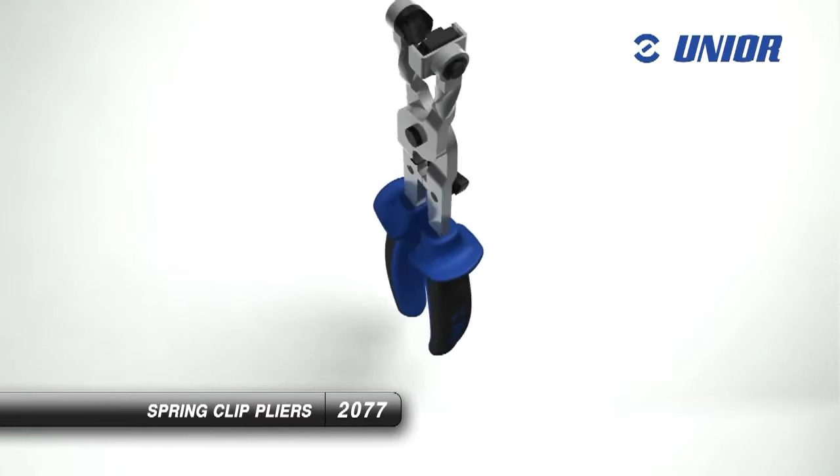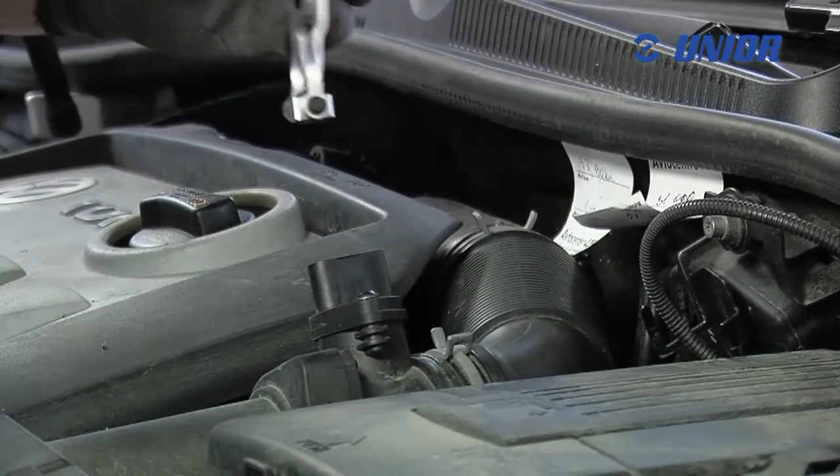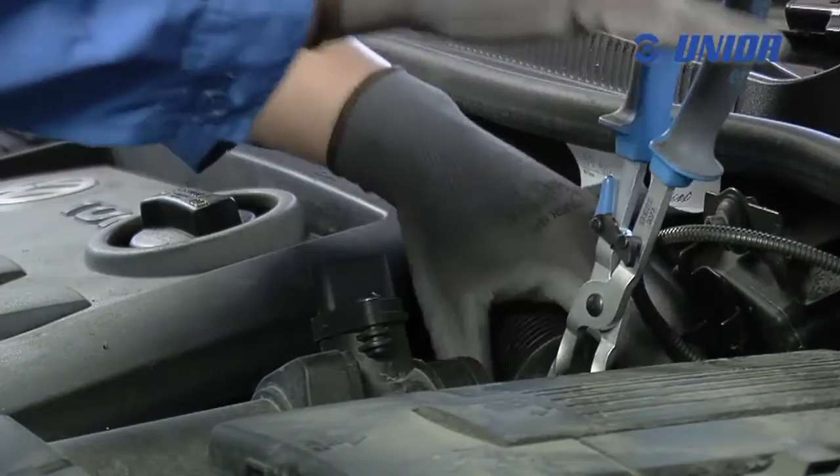Spring clip pliers are used for opening tube clamps, enabling the quick and safe removal of tubes from tube extensions. They're also used for closing the tube clamps when tubes are attached to tube extensions, to prevent tubes from falling off the extensions, thus ensuring the safe movement of fluids. The pliers can be efficiently used in places which are difficult to access. A firm and safe grip is ensured by the ergonomic shape of the handles.

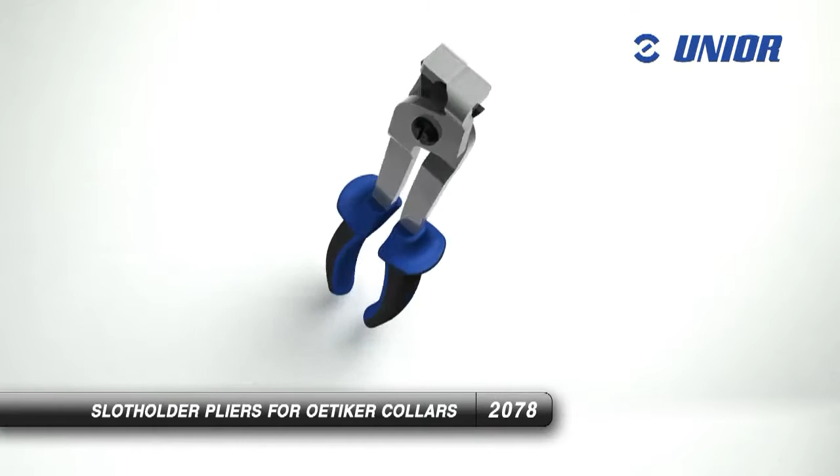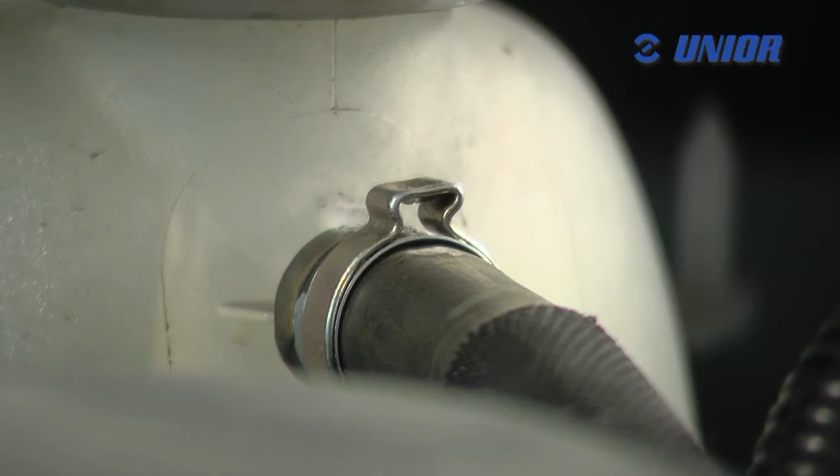Slot holder pliers for Oetiker collars are used for opening the tube clamps, enabling the quick and safe removal of tubes from tube extensions. They're also used for closing the tube clamps when tubes are attached to tube extensions, to prevent tubes from falling off the extensions, thus ensuring the safe movement of fluids. The pliers can be efficiently used in places which are difficult to access. A firm and safe grip is ensured by the ergonomic shape of the handles.

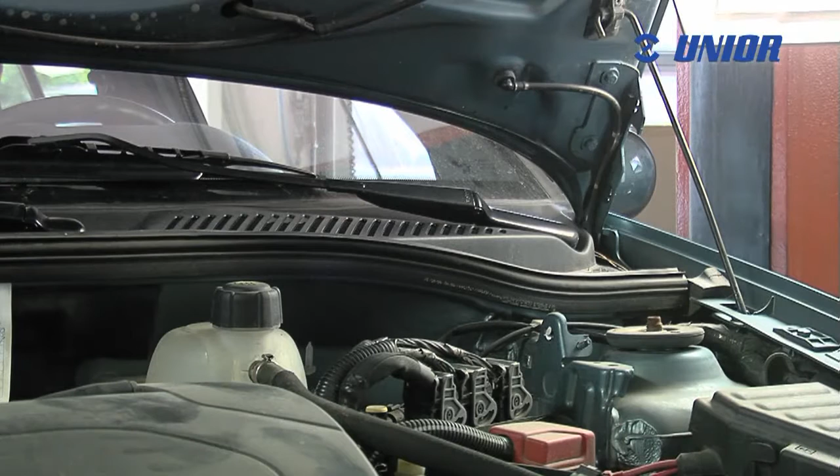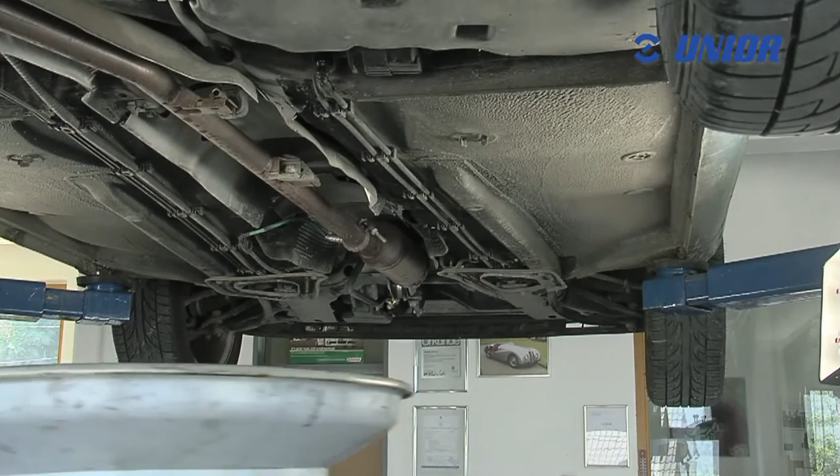Quick coupler pliers for fuel pipes are used for the removal of the quick couplers that connect fuel lines. The tool has two forged pins in the jaws that compress the coupler during removal or repair, so the hose can be removed. The jaw is dimensioned and adjusted to enable safe and easy work with great force in a limited space.

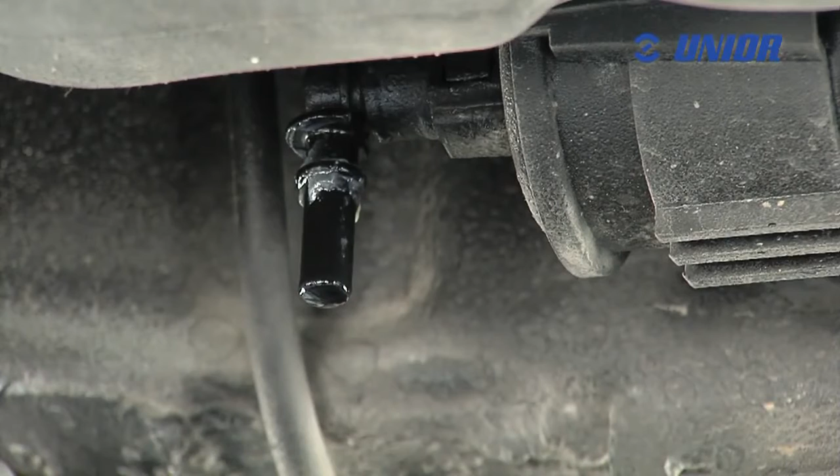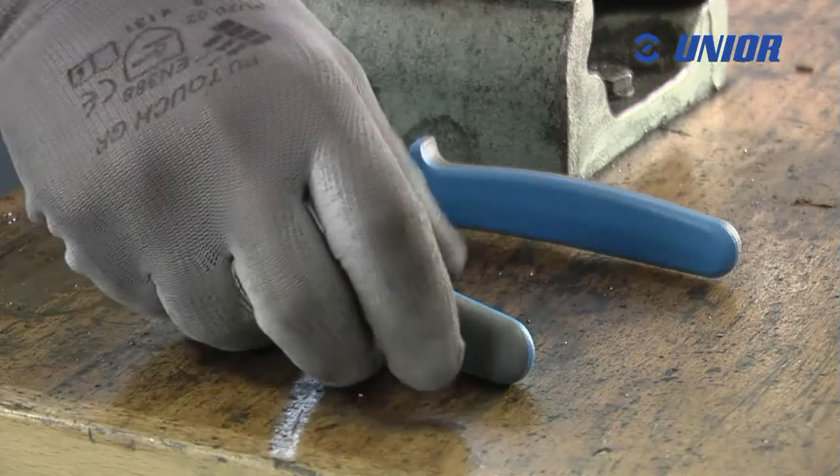Click collar pliers are used for opening the tube clamps, enabling the quick and safe removal of tubes from tube extensions. They're also used for closing the tube clamps when tubes are attached to tube extensions, to prevent tubes from falling off the extensions, thus ensuring the safe movement of fluids. The pliers can be efficiently used in places which are difficult to access. A firm and safe grip is ensured by the ergonomic shape of the handles.

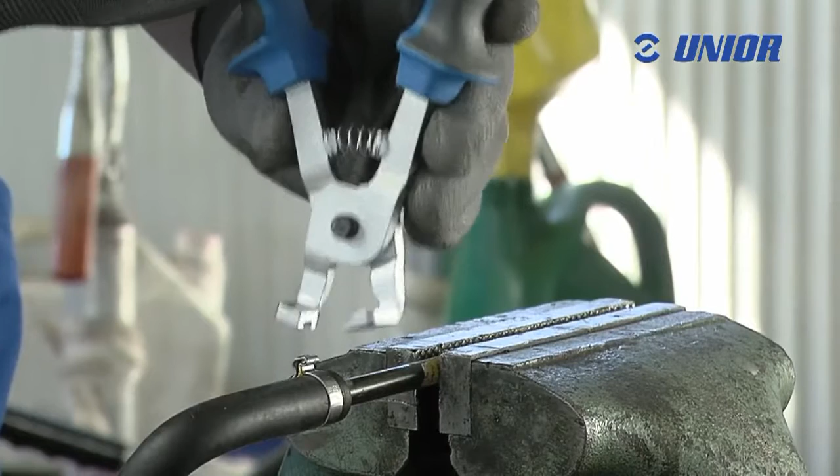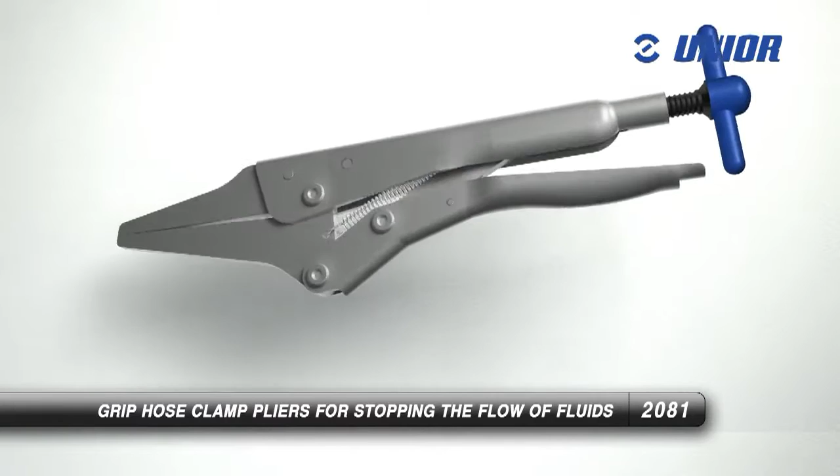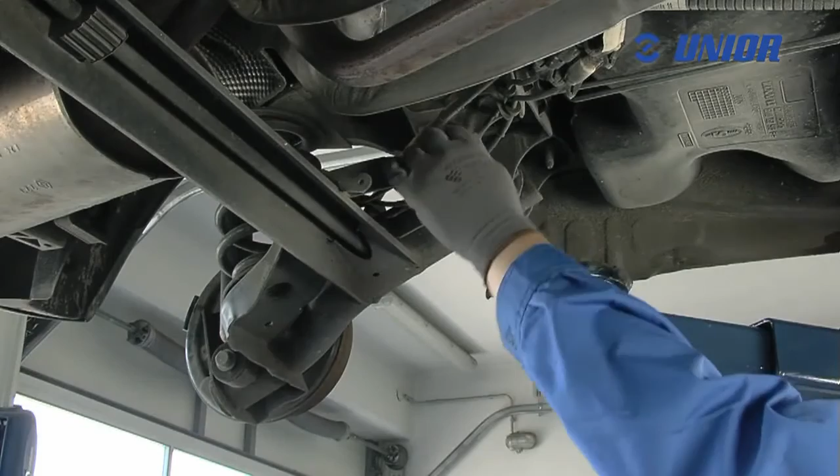Grip hose clamp pliers for stopping the flow of fluids are an indispensable tool when changing various automotive parts connected with liquid-bearing hoses. The tool's main function is the stoppage of the flow of various fluids in soft hoses, so a certain part can be replaced without interruptions or worrying over a potential spillage. The tool can be used on soft hoses in cars, trucks, agricultural machinery, as well as various nautical vessels.

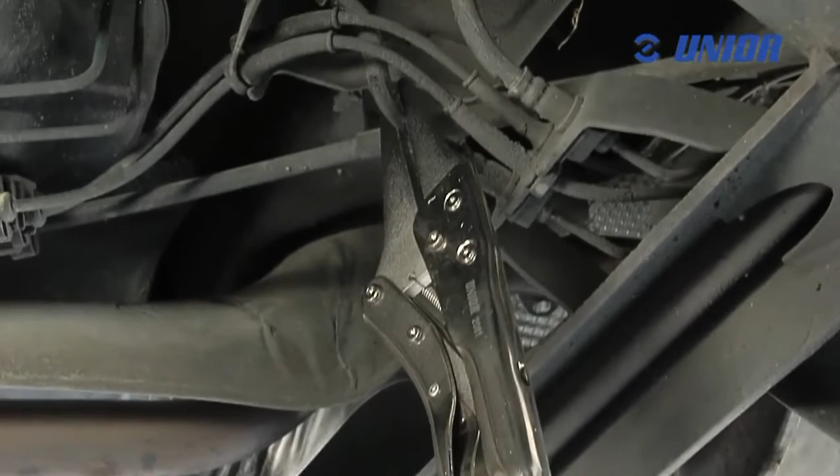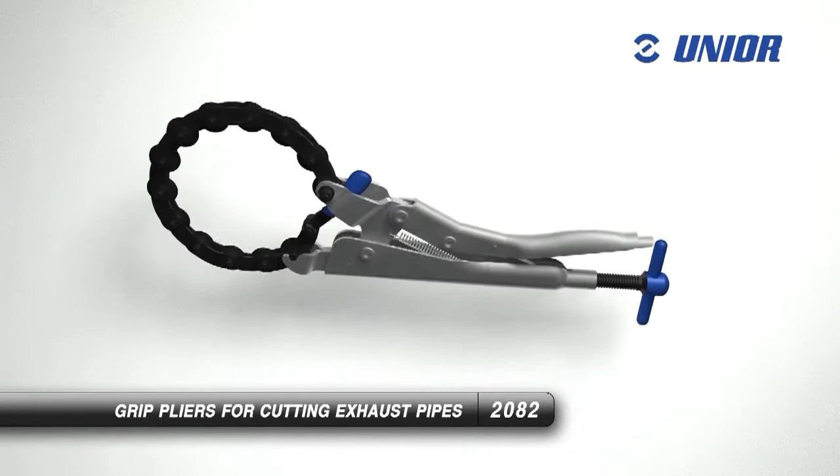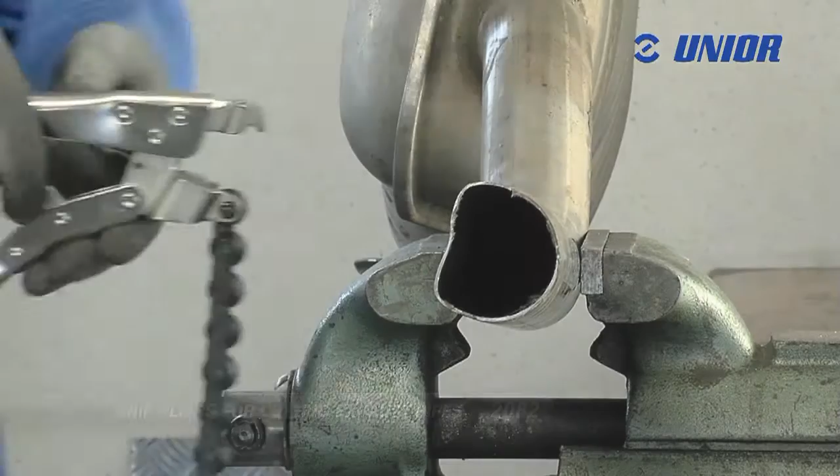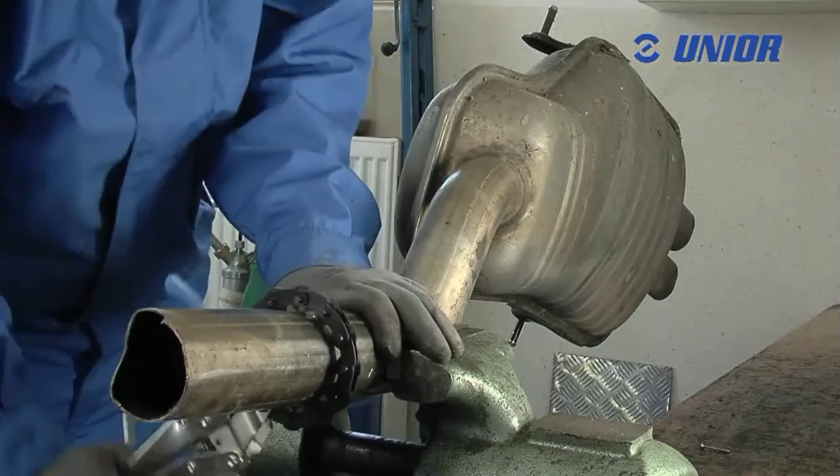Grip pliers for cutting exhaust pipes are primarily intended for cutting exhaust pipes, but they can also be used for copper pipe, plastic pipe, and various other pipes with a diameter between 25 and 85 millimeters. The tool is safe and easy to use due to accessories like a longer cutting chain, larger cutting blades, plastic-coated T-handle that decreases the amount of force necessary to use the tool, and universal locking mechanism. The cutting chain is subject to wear, which is why we are offering it as a spare part.

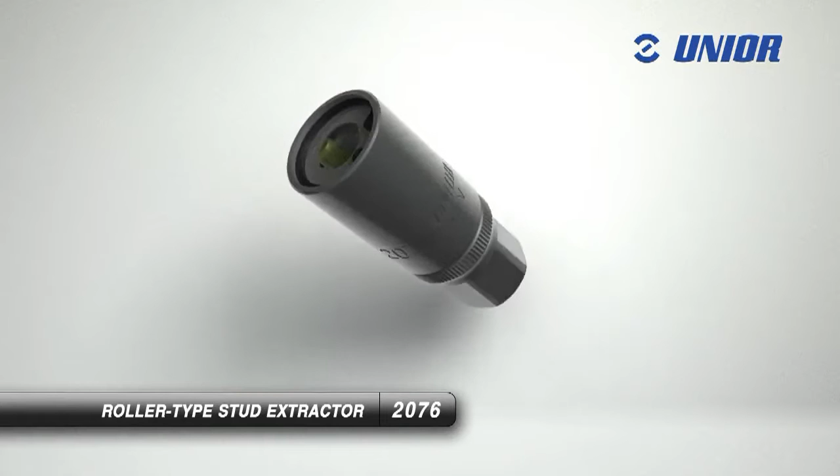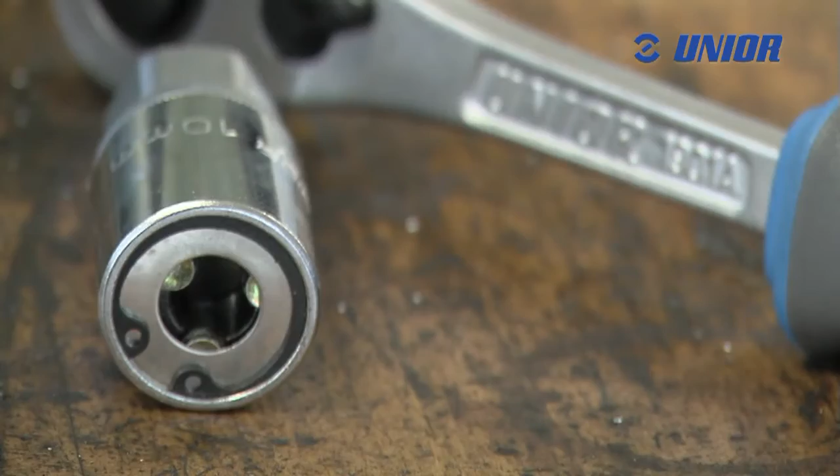The roller-type stud extractor is a tool for removing studs without damaging the threads. The tool works through a system of 3 rollers that grip the stud at 3 points during removal, removing the stud without damaging it. The rollers have no sharp edges, enabling removal without causing damage. Despite this, the tool can work in both directions. Tightening with the tool is not recommended, however, as the increased force when tightening could damage the system of rollers, which are dimensioned solely for loosening.

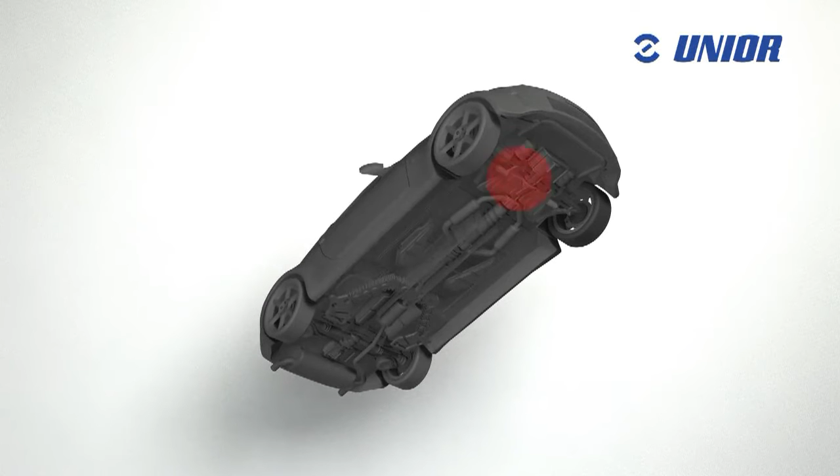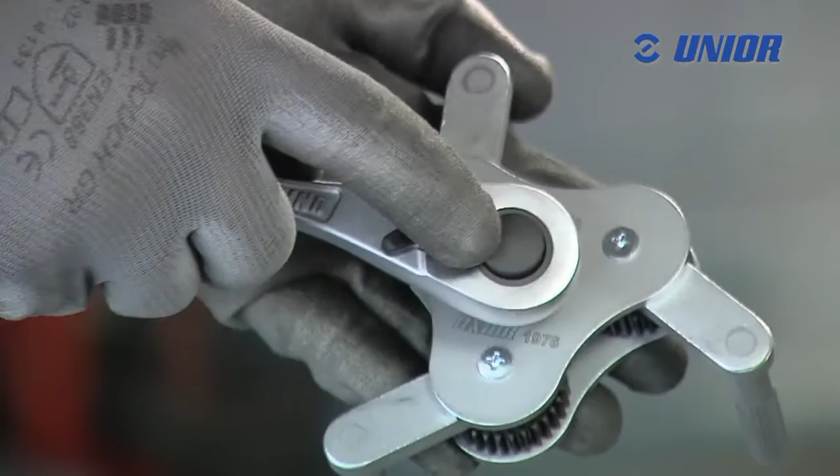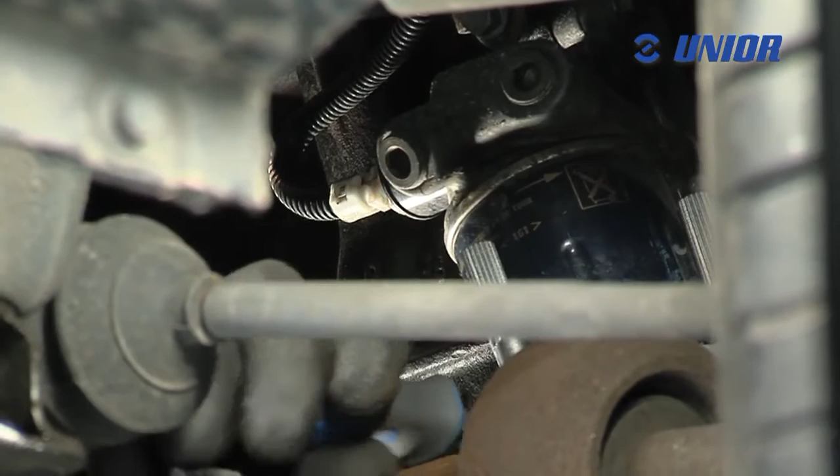The adjustable oil filter wrench can be used on the majority of standard filters. When used, the tool conforms to the filter, as tightening it makes it grip the filter. Because of the limited space during changing, the tool is sized and adjusted to require as little space as possible. The hooks are ribbed to make them suitable for filters without an edge to allow gripping. The tool works in both directions and thus allows both the tightening and loosening of oil filters as it adjusts and utilizes the effort invested optimally in both cases.

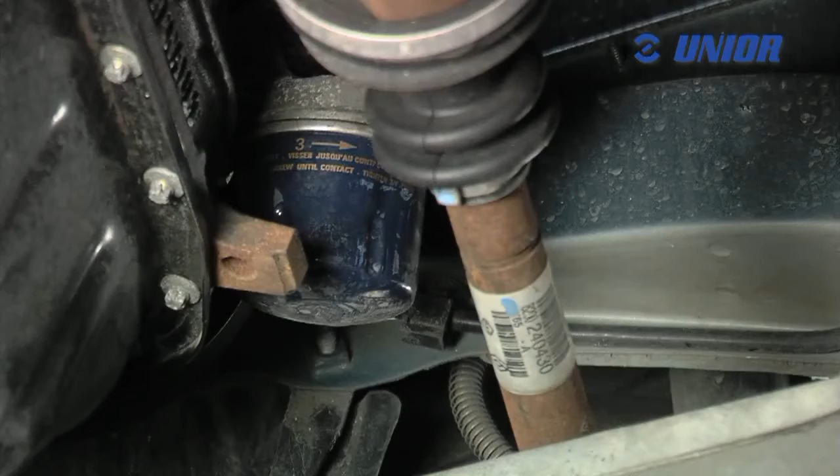The oil filter wrench tool comes in as many as 8 sizes, which can be used on the majority of standard car oil filters on the market. Using it is simple, as all that you need to do is place it on the filter and rotate it easily. The tool can be used when fitting oil filters, as the design and material have been carefully selected so that the tool can withstand the maximum force applied to it. Because of the surface protection, the tool is highly resistant to scratches as well as to atmospheric and chemical effects.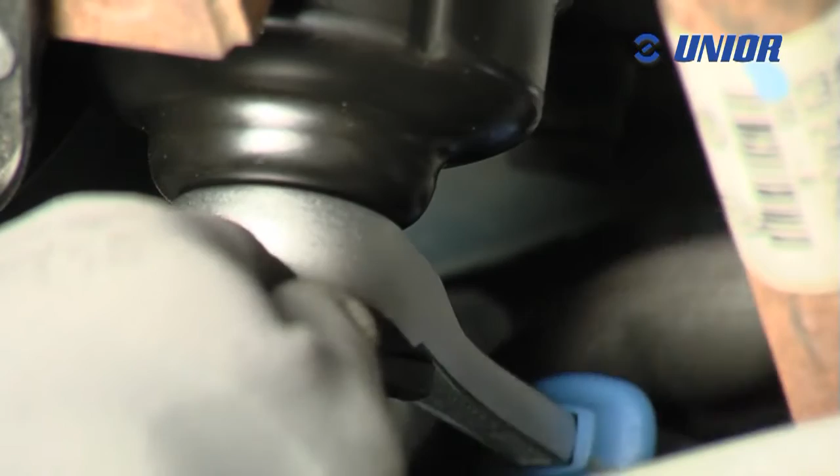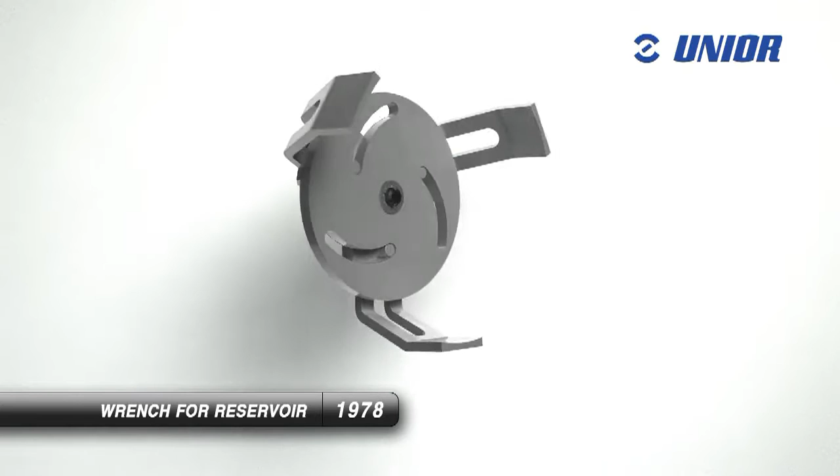The wrench for reservoir has 3 removable hooks that grip the gas tank cap firmly so it doesn't move. As access to this cap is usually difficult when making replacements, the tool is constructed so that it requires minimum space. Simply place the tool on the cap and rotate it in the appropriate direction.

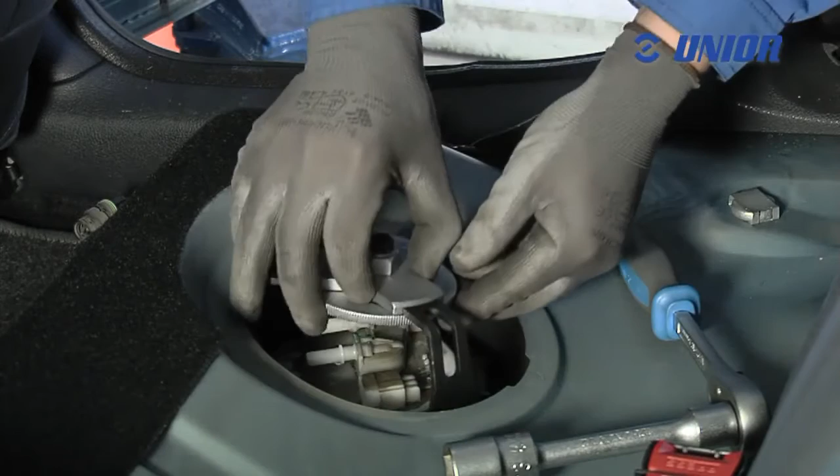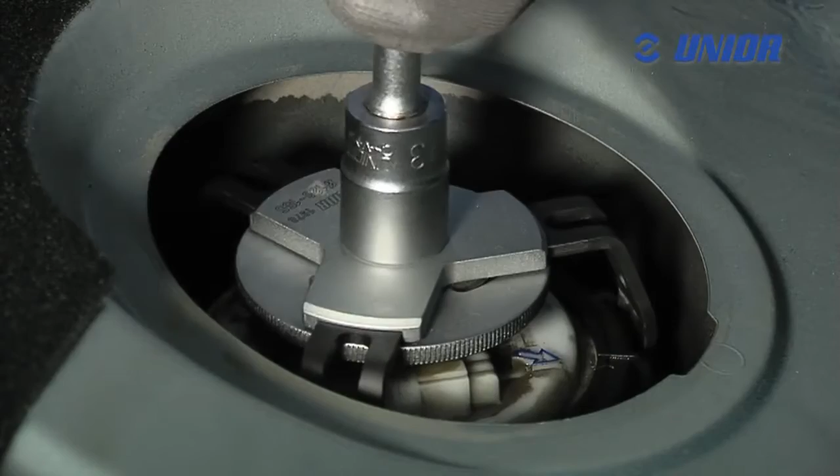The tool adapts to the cap itself and the cap can be removed very quickly. The replacement of the cap is also straightforward. This tool ensures safe work and long service life.

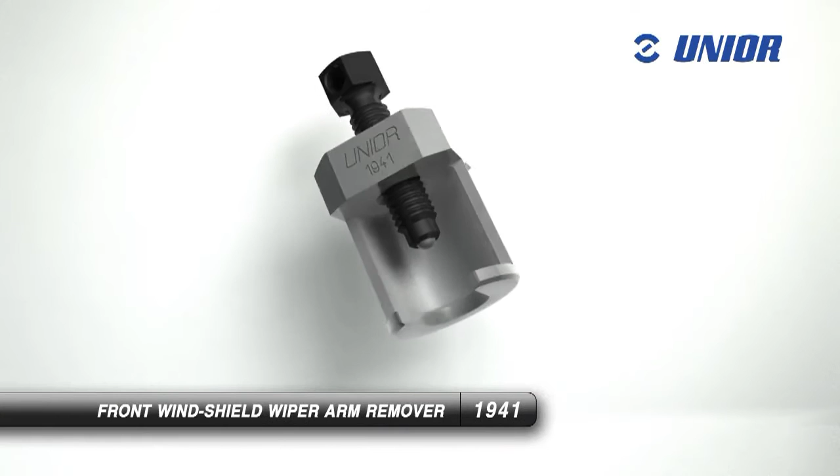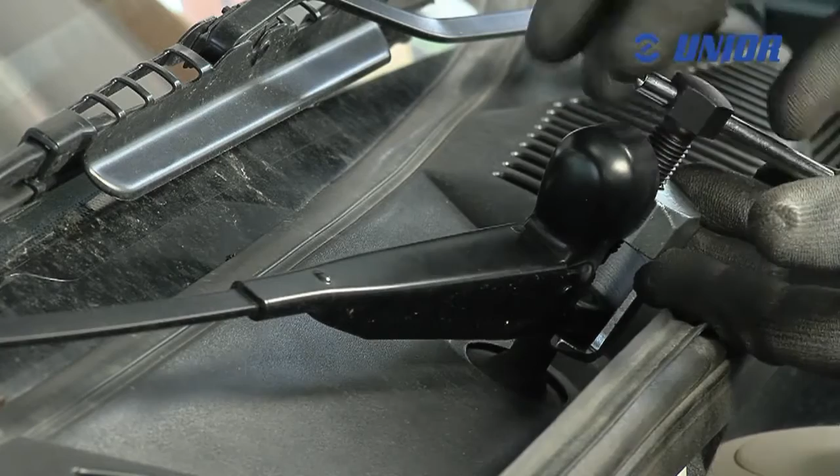The front windshield wiper arm remover is a tool for the removal of front windscreen wiper arms, with a robust construction which enables the application of greater forces when removing arms that have become glued to the drive shaft, as well as extending the service life of the tool. They are used for removing wipers elevated above the surface of the car body. Working with this tool is straightforward and quick.

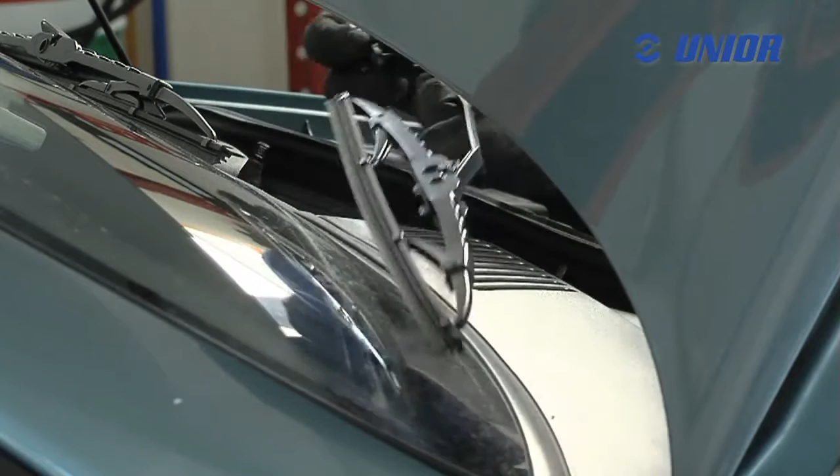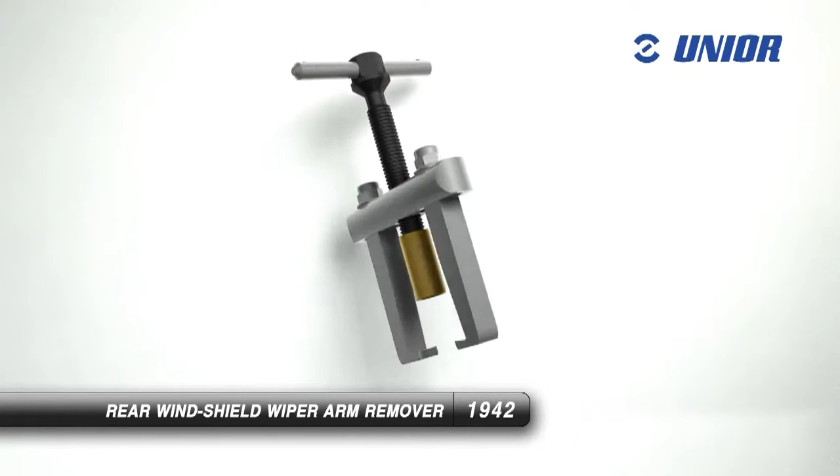The rear windshield wiper arm remover is a tool for the removal of rear windscreen wipers, designed to enable simple removal of all types of rear wipers. The adapter of the remover spindle protects during work the hose that supplies the cleaner fluid.

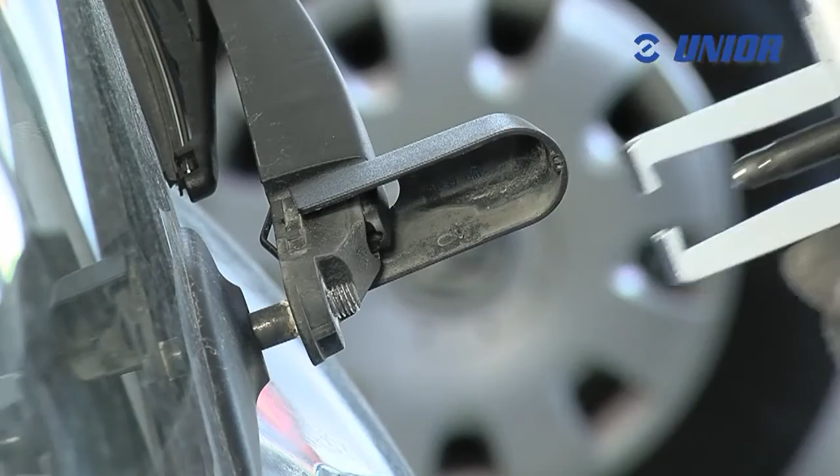The removal forces required use a 13mm wrench. The construction of the tool ensures its long service life.

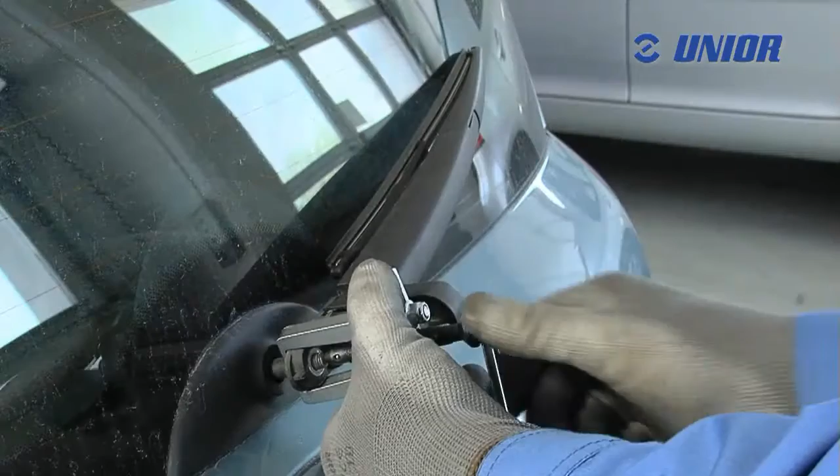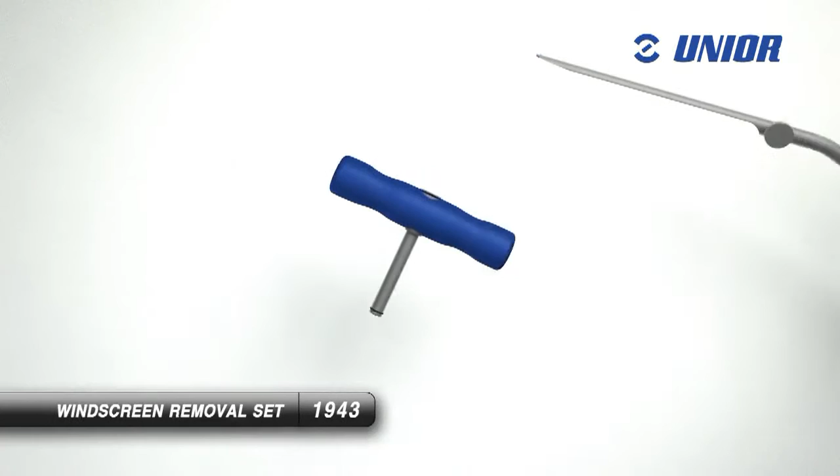The windscreen removal set is a set of tools for the removal of glued windscreen glass with the aid of a wire. Using the longer tool, make an opening between the car body and the glass, through which you run the wire, which is then attached to both tools.

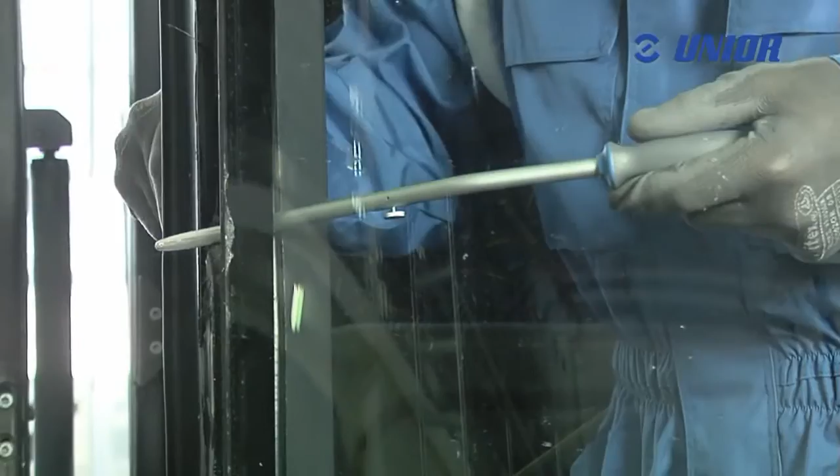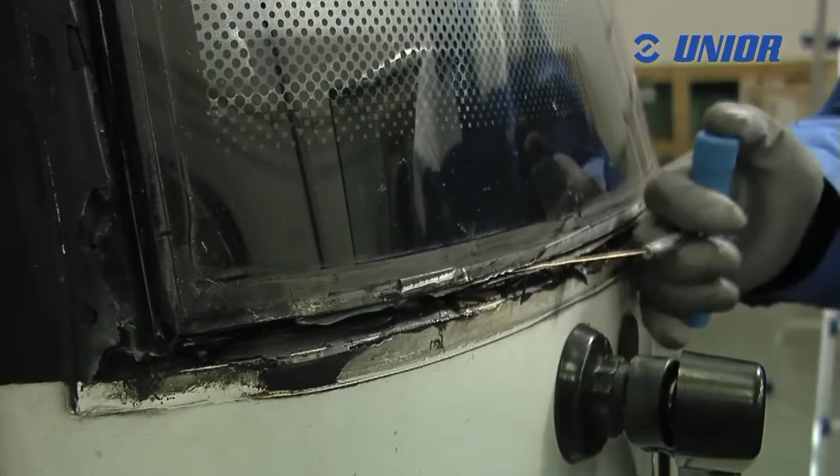Using the T-shaped tool, pull the wire between the car body and the glass, thus separating them. The tool is made to allow fast and safe work, while its shape ensures the work is performed without expending excessive energy. Square steel wire and round steel wire for the windscreen removal set are also available.

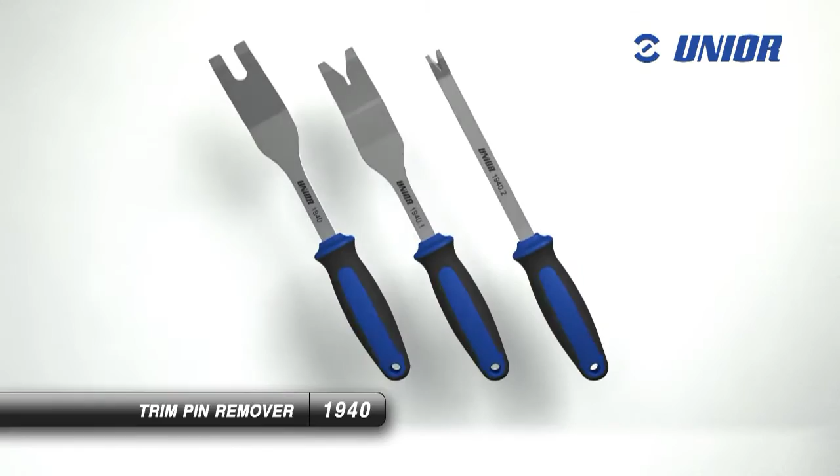The trim pin remover is used for extracting fastening pins, removing trim, and for various upholsteries. Their ergonomic design allows safe and easy work in various positions and in difficult to reach places without damage to the items being extracted or removed. Available in 3 dimensions.

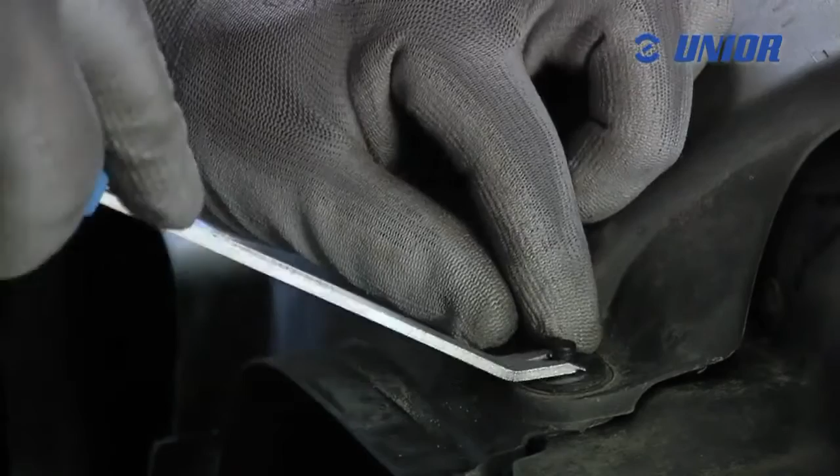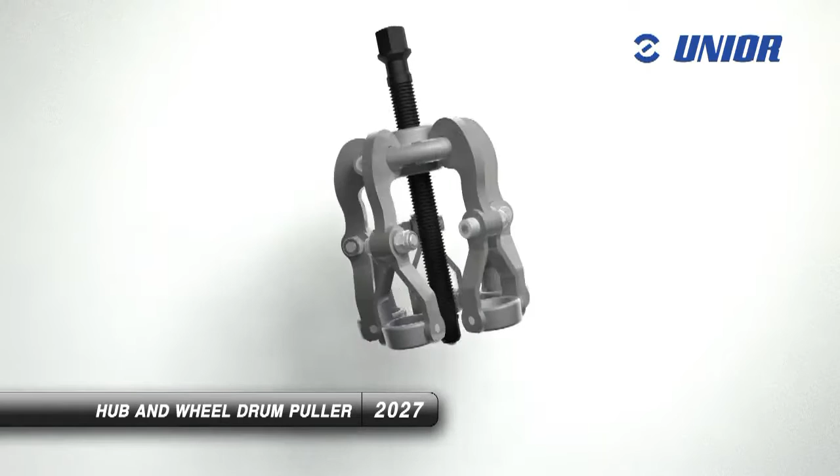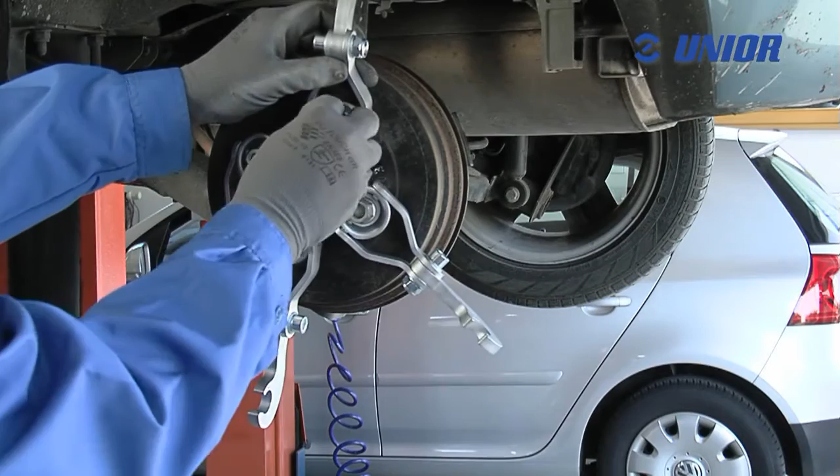The hub and wheel drum puller is intended for the disassembly of various wheel hubs. It is designed for simple and flexible use. Because its use is extremely flexible, the tool is useful for the majority of hub types up to a diameter of 250mm. The tool consists of a spindle, 3 extractor hooks and a forged hook handle.

The handle also has an additional notch that prevents the extractor hooks from sliding off the tool during the assembly or disassembly of the hub.

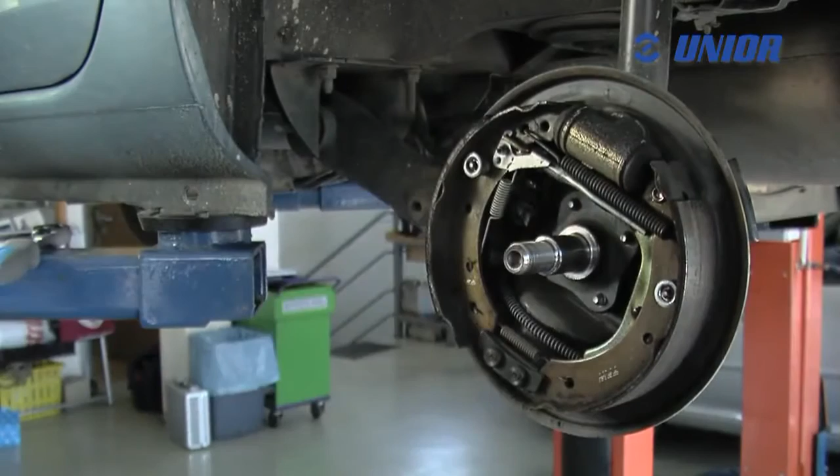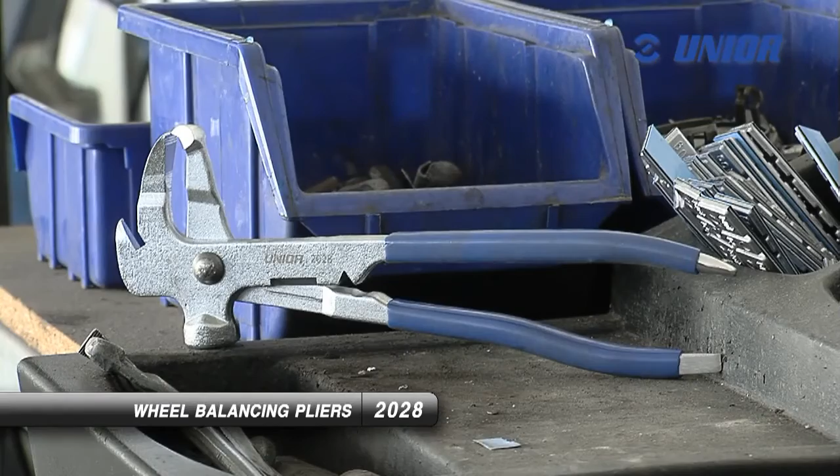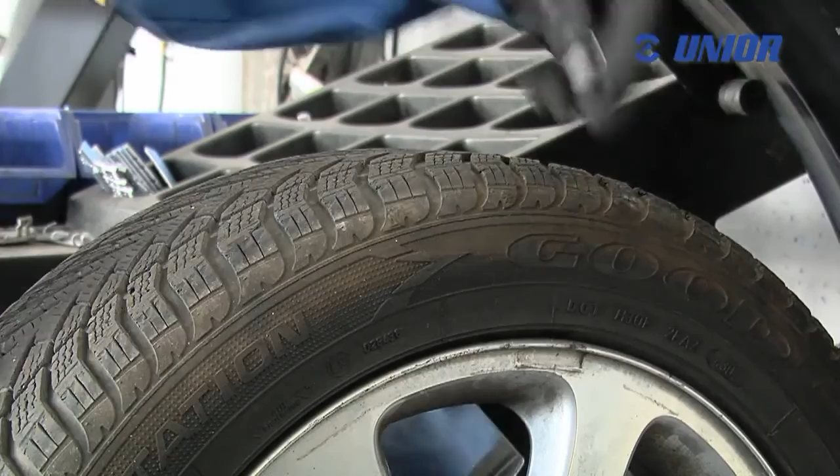Wheel balancing pliers are used to remove and attach wheel balancing weights. The tool has several functions: forming wheel balancing weights, removing wheel balancing weights from wheel rims, attaching wheel balancing weights to wheel rims, and removing wheel balancing weights from alloy wheel rims. The tool features a plastic-coated handle for greater user comfort during handling.

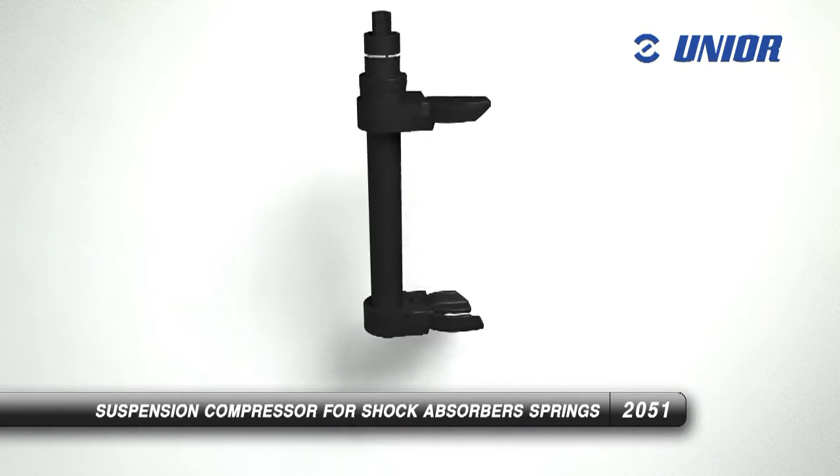The suspension compressor for shock absorber springs is intended for the removal of car shock absorbers and is mainly used to compress the springs in McPherson struts. The tool set contains 3 different pairs of grippers that almost completely cover the range of different McPherson struts.

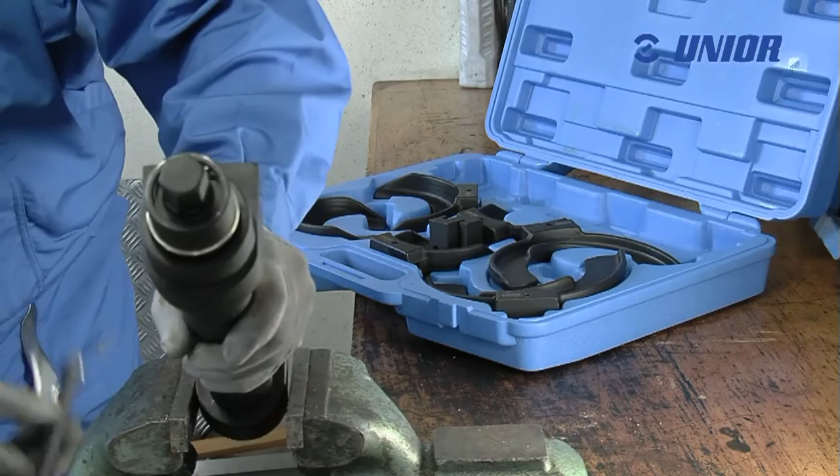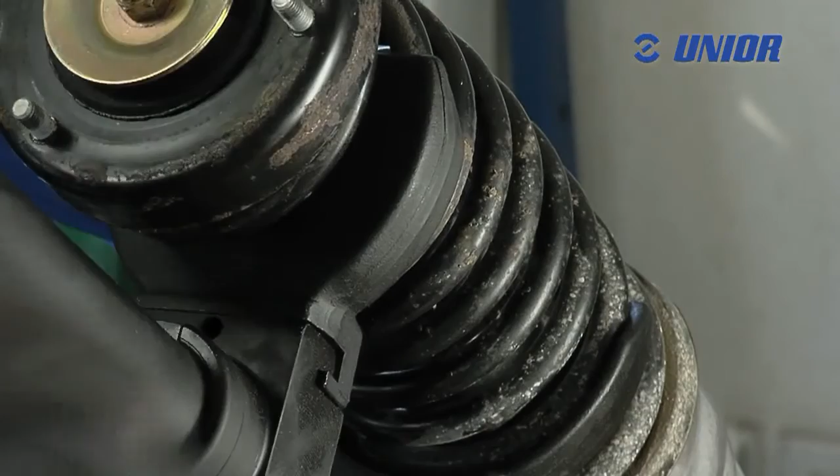The tool set also includes a spacer bar for conical springs, which increases the usefulness of the shock absorber remover. For safety reasons, all grippers in the set feature enlarged grip edges to firmly grip the spring in the tool, thus preventing any possibility of slipping that could injure the user.

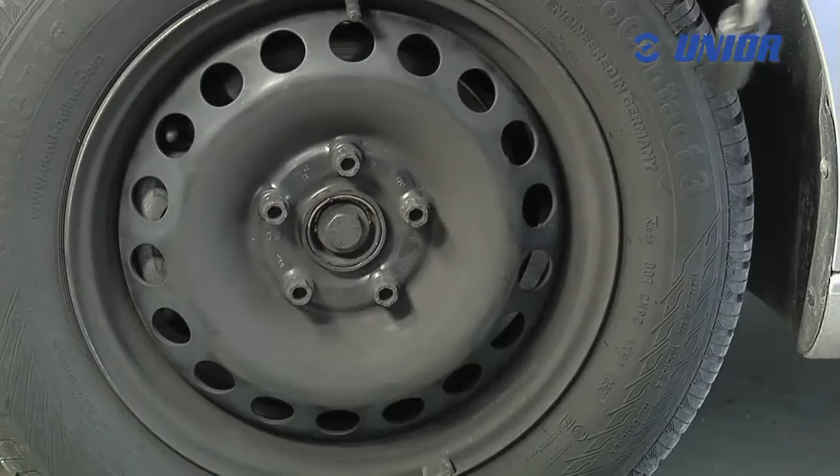Fixed torque wrenches are mainly used in the automotive industry when changing tires or when the preset torque is sufficient for the required torque. Wrenches require no time-consuming setting of the torque amount because several different amounts have already been preset. Fixed torque wrenches are color-coded, so you're able to find the proper wrench quickly and easily.

When the desired torque is reached, the wrench emits a characteristic sound so that the user immediately knows when to stop fastening. When released, the wrench resets itself to the starting position and can be used again to apply torque.